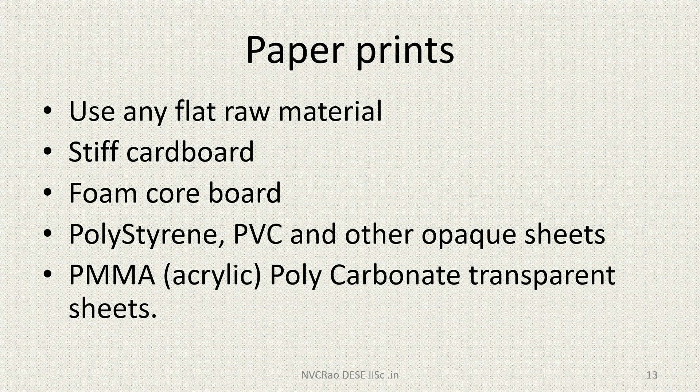Now, kindly look at my, what do you call this thing, saying it is very convenient for us to use any flat material, because most of the things are made and use the printouts as template. So, we have this template here. You can always stick it on the intended material, then you can carry out operations, then any work spot, like it could be anything.

Here it comes to mounting and fastening methods. Traditionally, in the case of molded parts, we have snap in place. Snap in place works well, but even there the first time simulating the snap fastener is a little tough. So otherwise probably use a screw or something, or even putting a tape is no problem. Holding two parts together, just about anything goes and your prototype is ready.

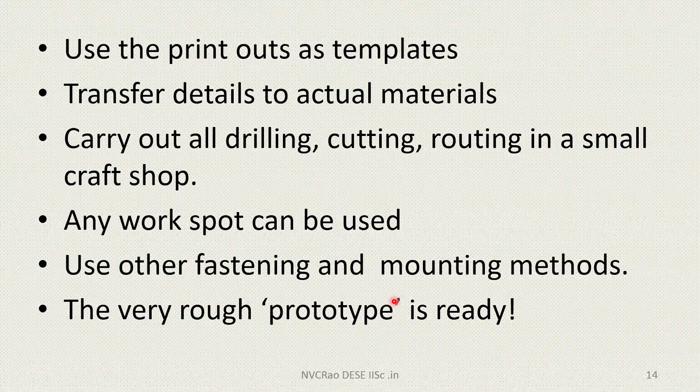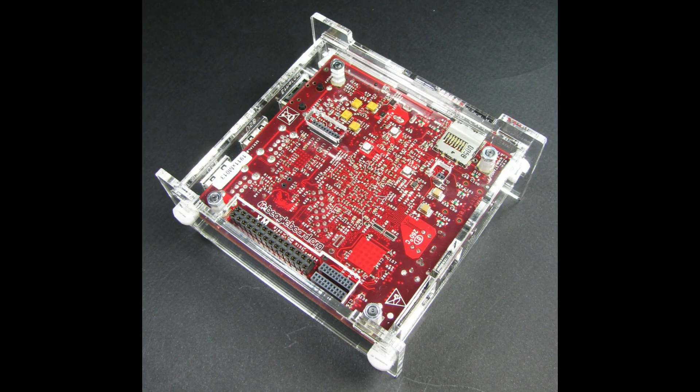Now, let me start with a few samples. This of course is taken from the available resources, and I acknowledge whoever has first made it and got this going. This one is a layout sheet prepared meant for probably laser trimming or laser cutting and assembling the whole thing together to make a beautiful system like this. Have you noticed this?

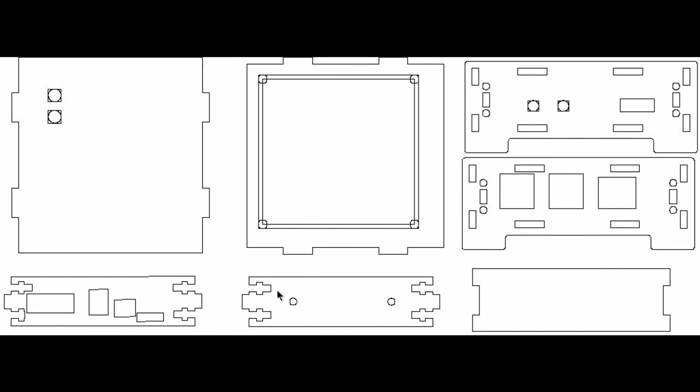This uses exactly all the parts that are described there, and in the corner, have you noticed this? There is a special key like thing which is assembled here. This key probably sits here. You see here there are some places, each will snap in place. Then you have seen these two things. These probably go and sit somewhere. So, you see here

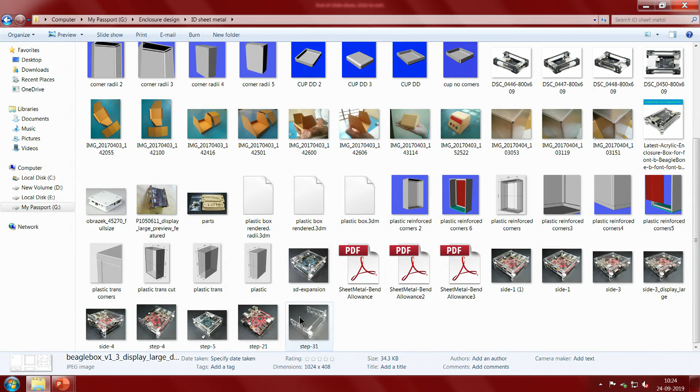even production parts are made with flat sheets, and every time you need not go and depend upon a full fledged printer... See the sequence. So, you have one pair part and then after that, see these are all, probably I will call it one face and two opposing faces, something goes, and then I just pointed out to you about the key or some fastener which is put here, and on the other side there is a bottom which is stuck on these things.

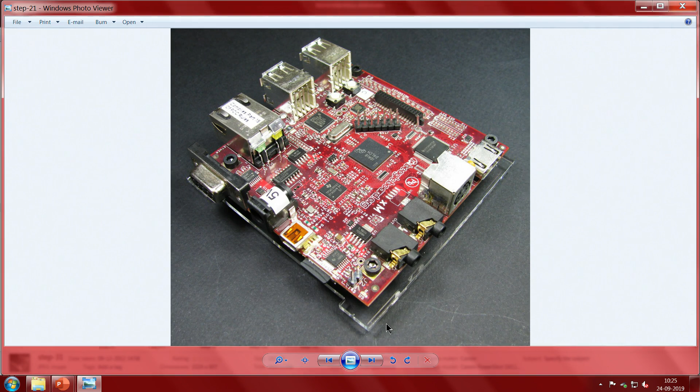Why I am showing you this is, probably this whole thing could have been made in cardboard at home, because cutting a cardboard is easy. Now, you see here the moment you assemble everything, we already have a nice neat box, and here this key has been shown. Now, maybe you can relate that you push it inside and everything sits here, just opening, part of them are open, part of them are joined together. See how cute the whole thing looks.

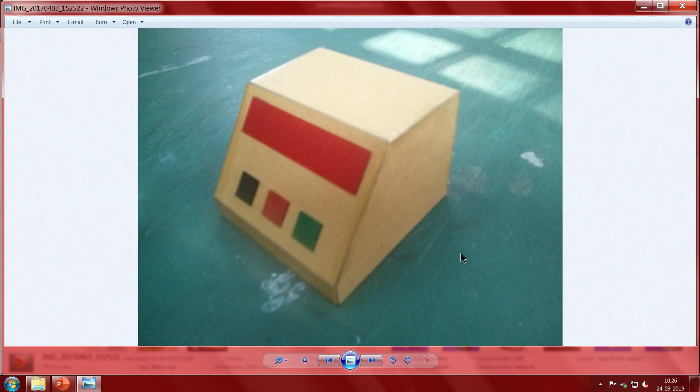Now, let me take the case of something which is invariably the reality of fabrication. Now, imagine one small, I will take this. See here, it could be any, this is just made as a student exercise. The idea being a cuboid structure, and there are the basic 6 faces. Right now ignore, of course there is a 7th face, ignore that. For you to understand typically the size, how you will hold it in the hand and so on, you have seen this.

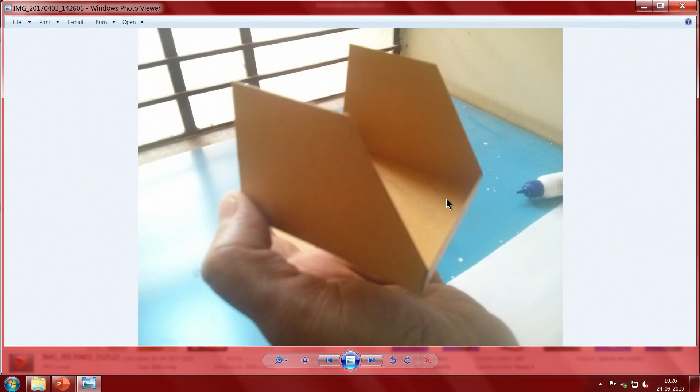That is my hand, and the whole thing is assembled by making things out of a simple cardboard. In this case it is a hobby cardboard, and two important details you will notice. I am sure you notice this. In the front there is a small tab, and at the back one more tab is there. The function of the tab is that it will hold the structure together, and it can also be used as a fastening technique, putting one on top of the other.

This being a flat object, it is exactly how something made out of polystyrene, or acrylic, or PVC, or polycarbonate can probably be made as well. Yes. Now you see both of the parts are put together. I have noticed some very interesting things about it. First of all, just for simplicity's sake, thickness has been ignored. But in the case of sheet metal, we will need to consider the thickness.

And you see a gentle inward curve is given that will ensure that things fit. Now you see this is a development drawing, I mean not a development drawing, a developed sheet based on a development drawing that has probably been pasted on an A4 size sheet, and they have just trimmed it according to that.

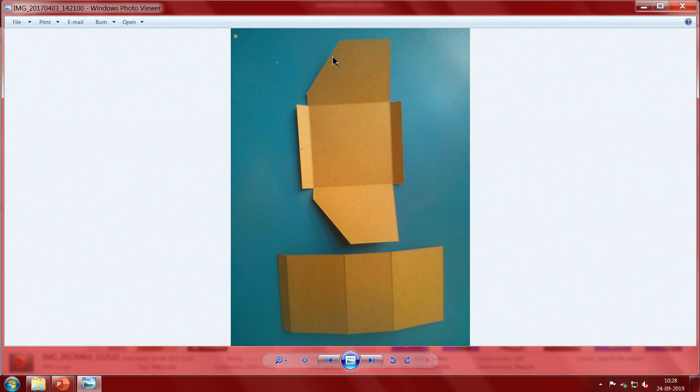So a little bit of thought has gone into that, and transferring such a thing directly into fabrication in large numbers is very, very easy. I just wanted to, as part of this, you have seen this, that is all that is needed, nothing exotic, nothing big, nothing very different.

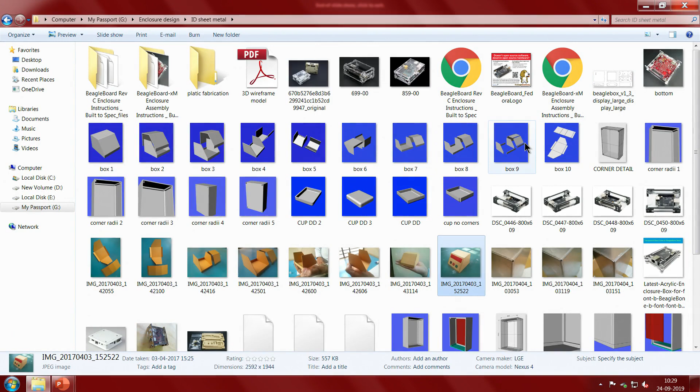Now, this is a slightly modified version of the other thing. If you are to use any other material other than the cardboard and which cannot be easily bent, a much easier way would be to probably make it into separate pieces. So here it is probably made out of an acrylic material, or in our case generally what we do, the top cover, this portion of it will generally be made of acrylic so that somebody can see inside, and this whole thing will be made probably out of acrylic but opaque, so that it looks a little like a product, but then you can place this on top of it.

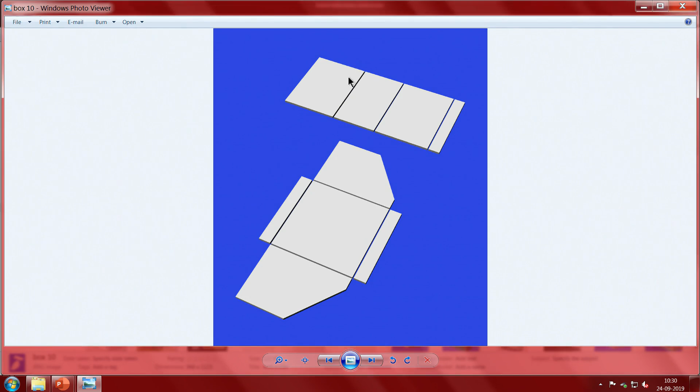Now we come to the interesting thing, what about the front panel which you are talking about. You see here all these pieces are small pieces. Now the first thing you will discover as part of your prototyping is that thicknesses are involved. Can you see here? There is a thickness, and now we need to take a decision: the height of this, does it go inside this and this portion covers it fully, or alternatively this is one portion and you have it as side two end caps. Depending on your design and various things you would like to have, you need to make a decision to subtract the necessary thicknesses.

Now we come into this corner, you have seen this here, this is cut normal, this is also cut normal to the surface. Does it match? Of course it does not, but you see here, the way this is shown, if I assume that this is a 45-degree angle, we have 90 plus 45, 135 degrees here, it does not match easily. So, at this point, a good craftsman, or you just need to match things and put up with it as things are.

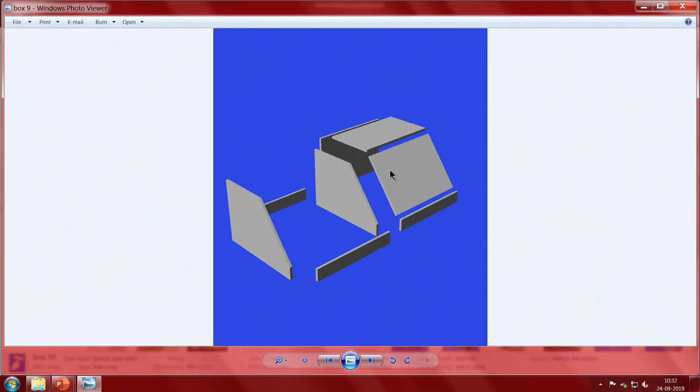Now, we come with a very clever alternative. Why need to match it at all? Why can't you let the top portion overhang a little? Let it overhang. Similarly, let this overhang a little, let this be recessed inside, and the moment you make this overhang by say 2 millimeters, you can have the side panels also jut out by about 2 millimeters. So, you have a bezel-like structure, three times a bezel-like structure, and you can probably hide all the imperfections. And part of the advantage is from the inside probably these two can be joined together using simple super glue or hot melt.

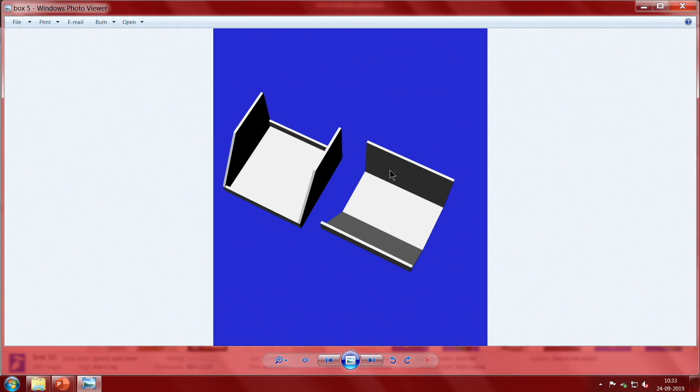See this, of course it looks miraculous, they have all been attached together, and now what was a thicknessless thing, suddenly there is a thickness. You need to just put these things together, and the other side of the view, see this, looks all hunky dory, there is no problem at all, except the little hunky doryness will probably need to be cured. You see this corner, this corner seems to be a problem.

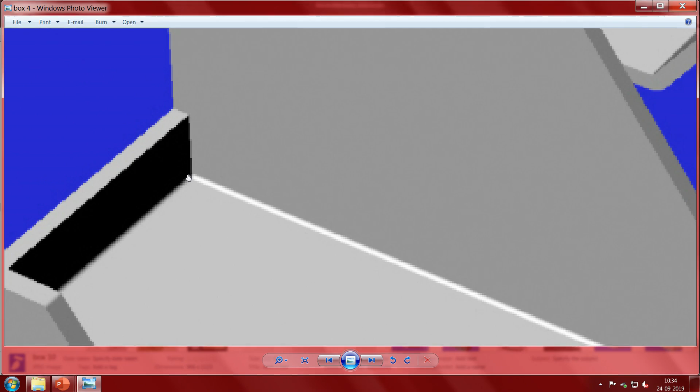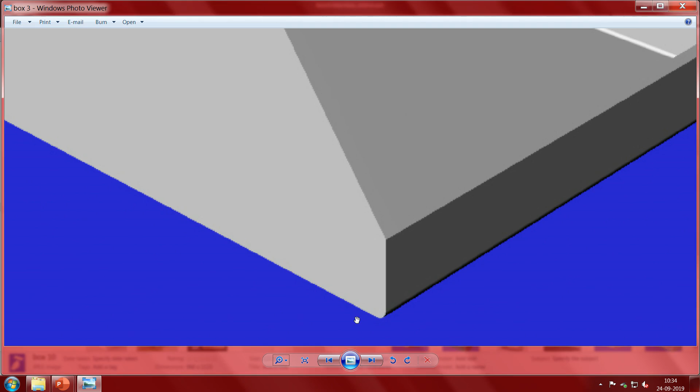In the original development, we have just assumed these things fit nicely, and then in this corner you will see a very, very interesting problem. This being a sheet metal exercise, you will see that there is always a radius here. Can you see? You have a radius. Now, how do you let the radii match with each other? We have chosen to ignore it, but actually there will be a gap here, and when it bends here, you need to give a corner relief for the whole thing.

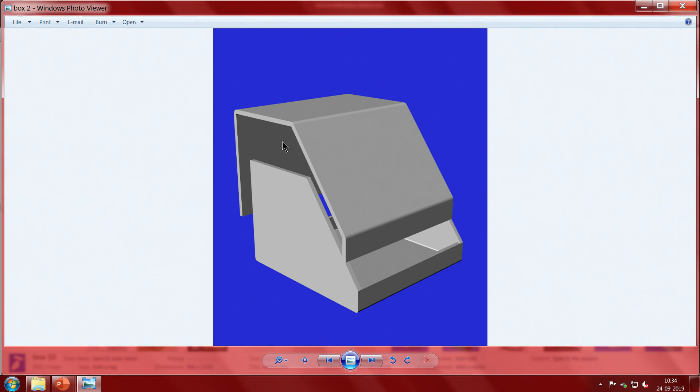So, we come to actual manufacturing practice, and this is what I was telling you here. You see this internal, and you see this internal, this appears sharp, but that has a radius. Something has to be done to address all those things. Eventually, when you put everything together, things should look neat. See here, neat means neat.

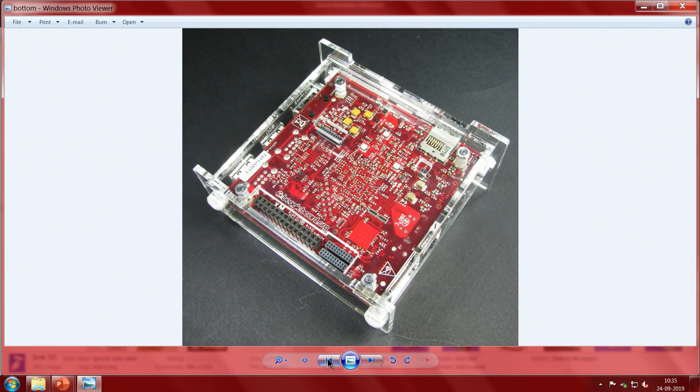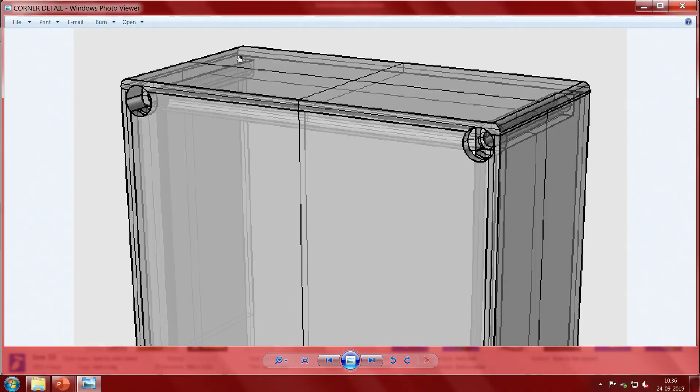Now, let me get on with something slightly different, a universal enclosure. Often you find this in the catalogs. In the catalog, you will find these are IP, that is ingress protection 54, 55 class of standard electronic boxes. You will discover some very peculiar situation by which your particular requirement does not fit into an available standard unit, because you have not started with that. You have not started with the standard enclosure and arranged things so that they can suit you.

And unlike the BeagleBone and unlike the Raspberry Pi and unlike the various other things I have shown you, Arduino, this is not a standard for which this IP enclosure has been made. IP enclosures have been made in a fairly interchangeable, universal big system. So, if you are smart and you know that you are replacing another equivalent existing unit, you can use one of those standard modules and try to fit your electronics, especially non-PWB hardware. I mentioned this to you right in the beginning itself.

We have connectors, we have control elements, we often have displays, we have so many of these things which go into that. So, if you see inside one of these enclosures, it is actually not a molded enclosure. This has been just created in a solid modeling exercise.

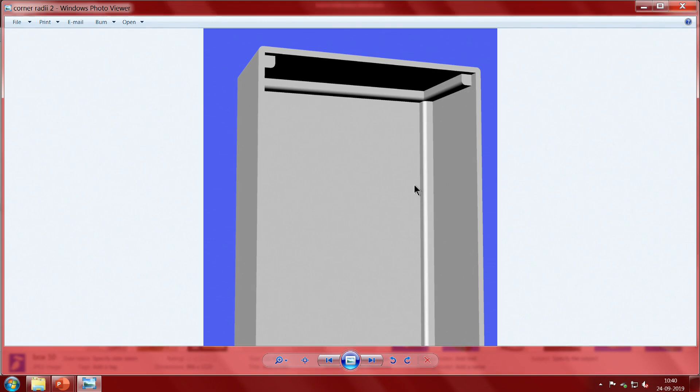This looks a little like this. Actually, it is nothing, just for my satisfaction, we have rounded it. 4 side faces of appropriate height have been taken, and these corner pieces have been attached to that. This has been filleted on the outside, otherwise there may be a fillet here. They have been filleted, everything has been joined together. It looks as good as a manufactured item.

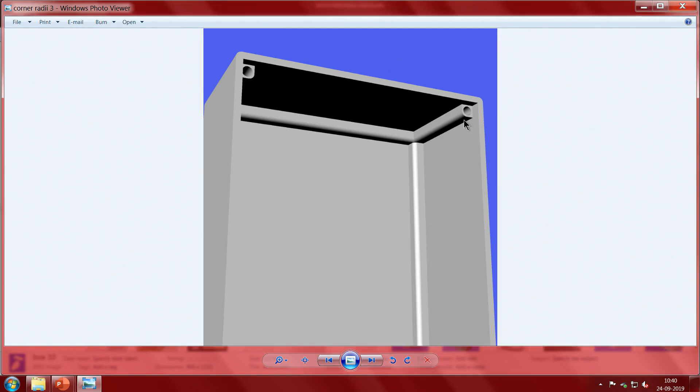Now, standard operations like drilling have been done, and on the top you have this. Now, you have a box, or you have an enclosure which is ready for me as I want. Notice something here, this is probably the back, and then you notice something here, something which is very, very interesting.

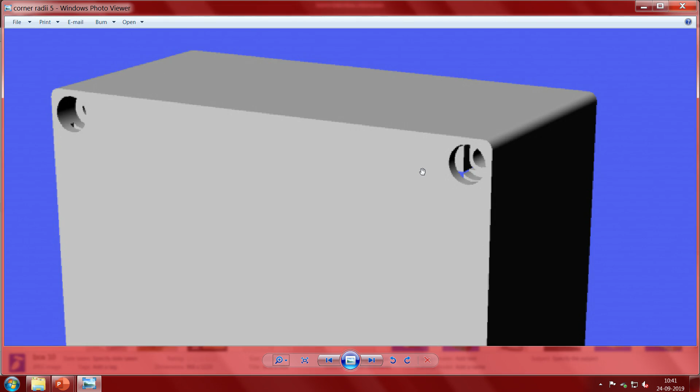Counter bore, and then on the other side there was something where it matters with a small adjustment. So, you can build in detail how you would like to deploy it somewhere. Do you need to have a clamp, attach it somewhere? All these details can easily be worked out.

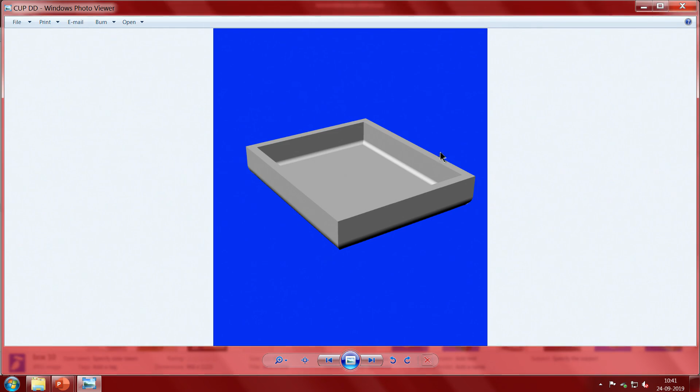Now, I will come back to a small thing I am sure several of you have seen. This is actually one of the small items which comes with our earphones. A thing like this eventually will be made in plastic, but if you are to make it in sheet metal, you will end up with a very, very unpleasant thickness all around it. Because of the small size, this thickness looks very, very daunting. Now, we come to the equivalent sheet metal of it.

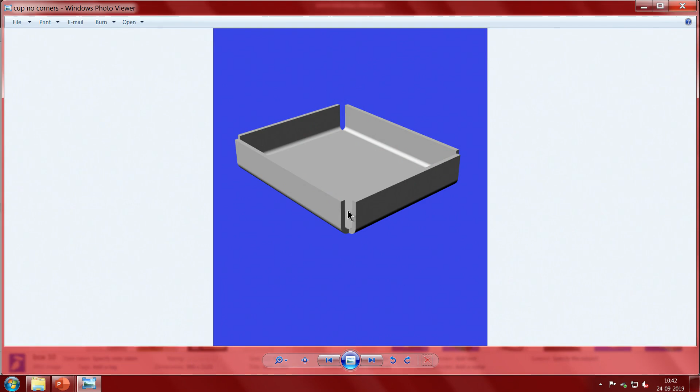Imagine that particular thing needs to be strong. Like if you throw it, it should not break. It should not be made out of a brittle plastic which is likely to shatter in the corners. So, we end up with the sheet metal version. You have seen the sheet metal version. This is what I was trying to tell you.

This corner, we end up with very peculiar detailing. There is no way around it. The only other way is probably you go in a little on that side and then bend it up like this. So, overall the dimensions can be maintained. Interesting, isn't it? This is where making a simple prototype helps.

Even our people who work on sheet metal often make that sample. They just take any available material. In my case as an engineer, probably cardboard is better for you, but in their case there will usually be some surplus or scrap material. They make a print, stick it on that surplus actual material which is likely to behave a little like the original material, then carry out all the operations and then do the correction in the main drawing.

For example, one of the things I tell you, I take it that approximately there is a box of some given dimensions.

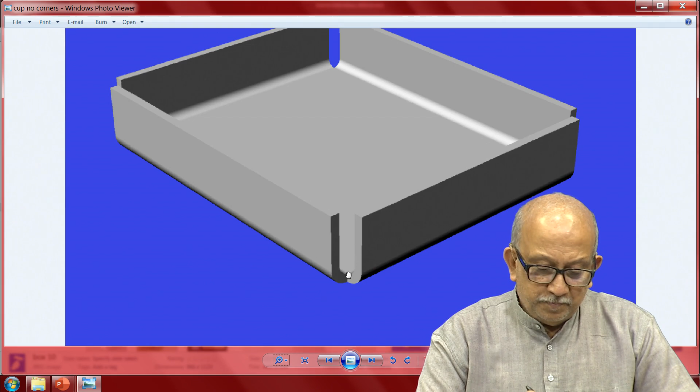I take it from one side to the other, this may be around 30 millimeters, other side may be 50 millimeters. So, 30 by 50, while it looks very fine here, you need to compensate on taking this thing inside. We take a small thing inside here, and once you take it and make a bend here, this thing is likely to jut out.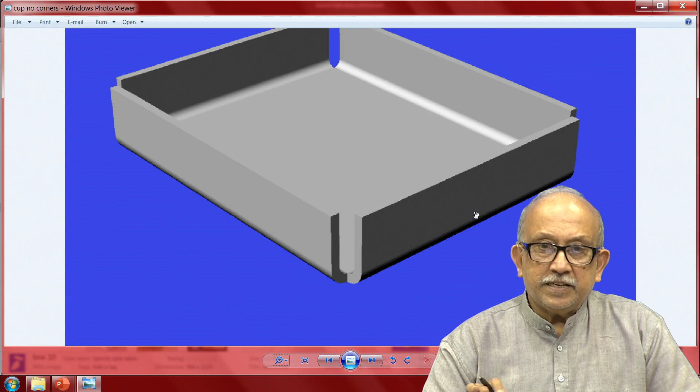All these dimensions, everything can easily be worked out in any CAD program. Typically, most students I come across are familiar with either Solid Edge or SolidWorks, and most of the products either by Dassault or by Siemens or any of the Autodesk products also have a sheet metal variant, a sheet metal add-on. Those sheet metal add-ons take care of all these details, but the main problem is

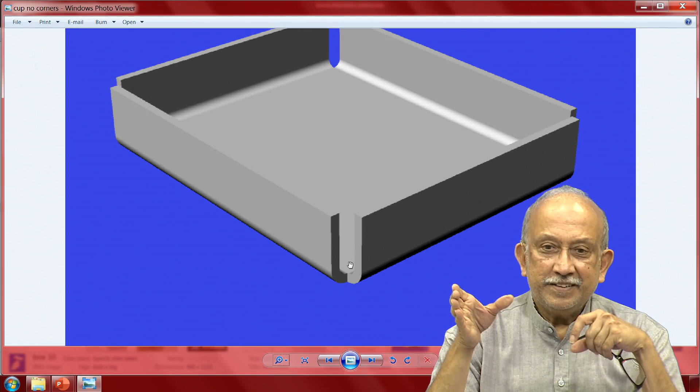data regarding the compensation, what is called the bending allowance, and behavior of the material, saying what is the minimum internal radius, and the type of fabrication machines you use. Everything is a variable which has to be taken from the physical shop. This is not a problem actually, this is a real issue with all the simulation work.

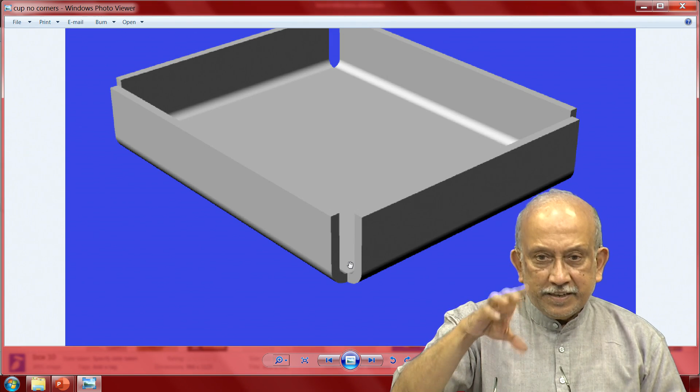There is a physical phenomenon. Based on the physical phenomenon you simulate, and then you find that one particular ratio probably needs to be altered a little, and hence you can either search for the material or make a compensation. The same way in our case, one still needs to make a sample piece of the final thing, especially sheet metal, and note down all the details.

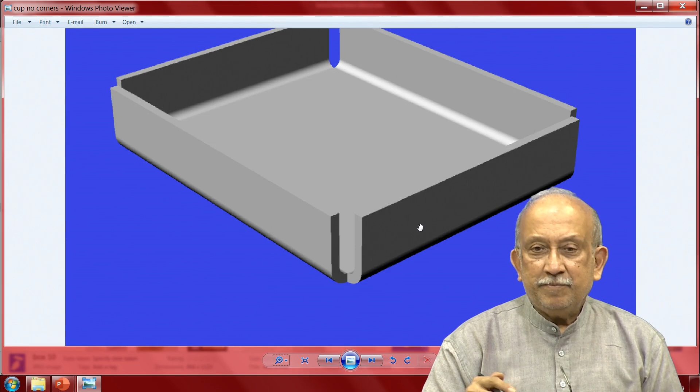In absence of this, for most standard materials, data is available. It may be off by maybe 0.09 millimeters. In general, it is very accurate and it does not really matter. For these things, once again allow me to stress that the starting point is a good CAD drawing and a concept in the mind.

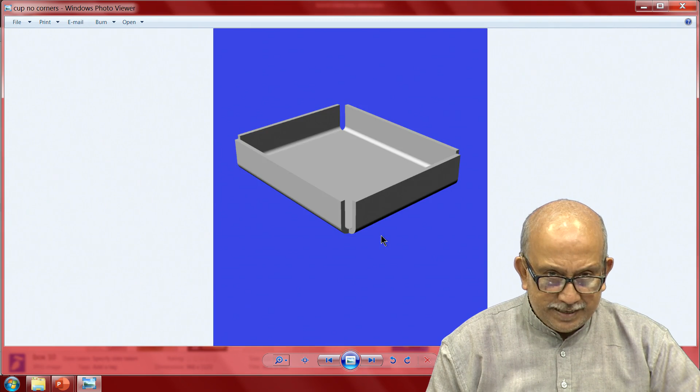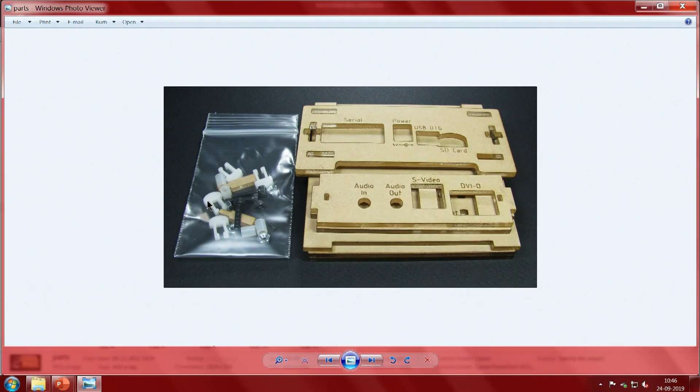Now, let me see what the next one is going to show. I do not know which part of it is metallic, which part of it is this thing. Now, you see here we have beautiful, I think I have covered this. I will now go back and pick on something slightly better. This is the laser trimmed or laser cut materials which are available on sale.

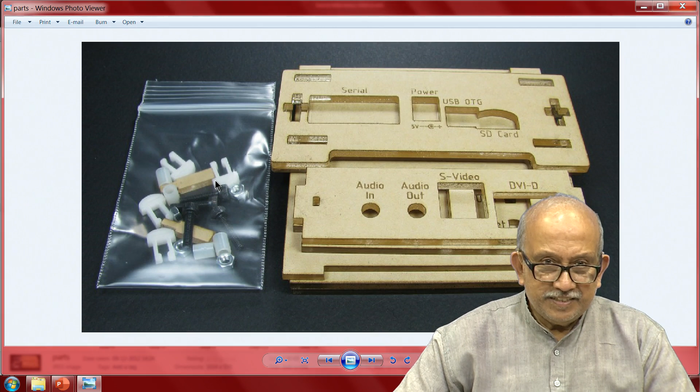Have you noticed, for example, your particular project may not need these two things, may not have audio at all, and you may have an SD card, but you may not have an OTG, on the go, cable. In this case a 5 volt power supply is shown there, but you may be using a USB, and the serial port is only needed at the time of programming, so you need to have a tab which can cover it. So, now you will notice that once you get all these items, this is a kit.

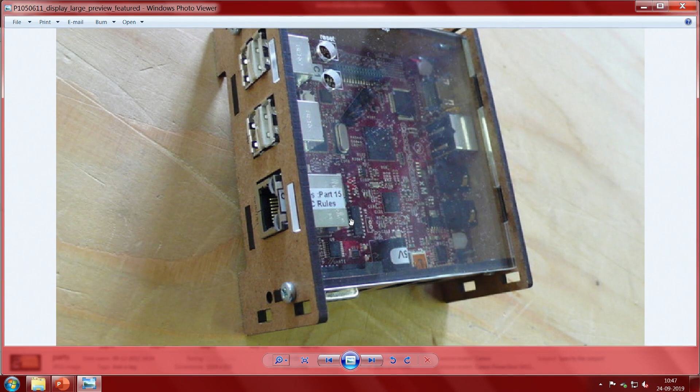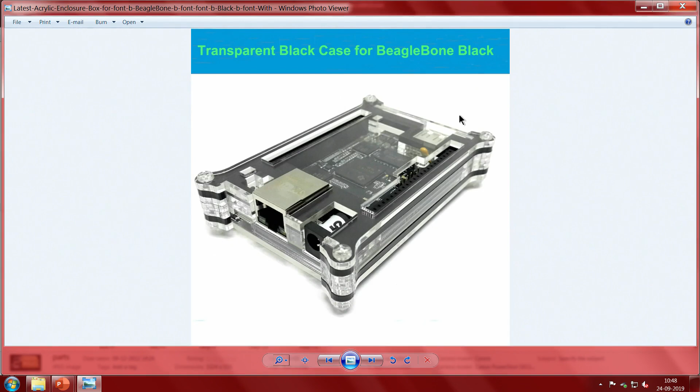Now, what about this? This is probably made by one of our students. You have seen this here. While this is actually made in a laser cut plywood, I am sure the whole thing could have been easily made by you in any other material. This of course is a professionally made item. So, you have various things which are sitting here. So, you can see these things can be built easily.

If you remember, the earlier slide showed you the corner that needs to be taken care of. The first time you go to the fabrication shop, you will notice that these details, while they are critical, are probably killing the product. You wanted a product which looks neat. All the renderings I have made look too neat, but this is the reality. So, how do you get over this? One reality is a radius. Another reality is gaps that do not close.

Fortunately, this is not your problem. This is the problem at the fabrication level. The first time, remember, you are likely to make everything out of assembled sheets, and then you show this, their process planning people will try to work out how best to make things. You see here, there is a very ugly sharp edge. When somebody tried to work on the sharp edge, it did not come out well, it only made it worse.

It looks crazy. This is a drawing made by one of the very common 3D programs. It is not by definition a full fledged prototype making app or software. It just shows the dimensions I want, saying this is probably 80 by 120, this thing would have been maybe 25 or 30 millimeters.

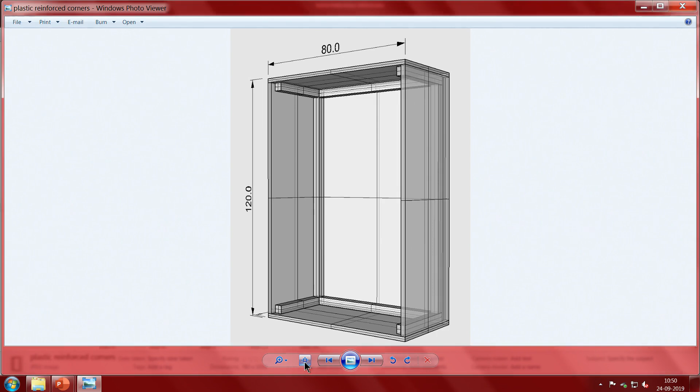Now why this has been made is, see this corner. What shows 80 is correct because it is visible, but this side plate need not be 120, it will be 120 minus 2 of the thicknesses.

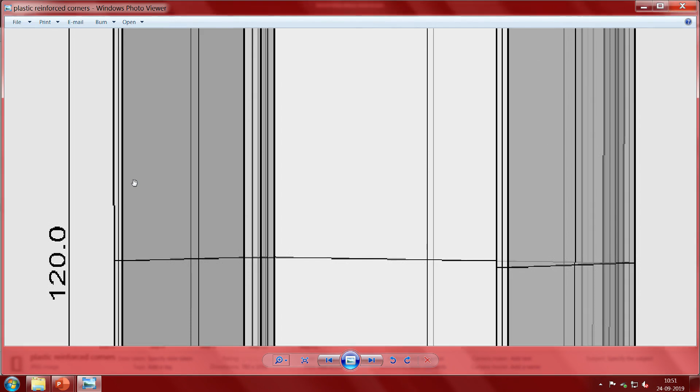Looks insignificant or trivial, but this is the one that makes or breaks your product. Once you take the initiative in making these things properly, you will have nice, neatly made corners. And you see here something else next.

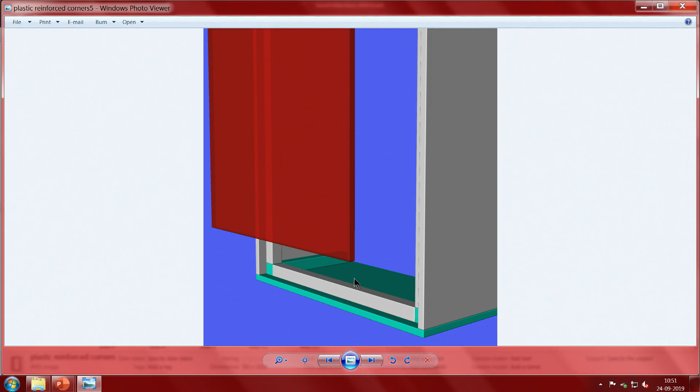You can even, in case you are using acrylic sheets and all that, use grey plastic, and I do not know why I have chosen green, just to show that I can choose green, and the top cover is an LED red filter. You can make the whole thing in one material and then add a small filter; the full thing can be made this way, and the remaining part can be masked. So it looks like a real-life product.

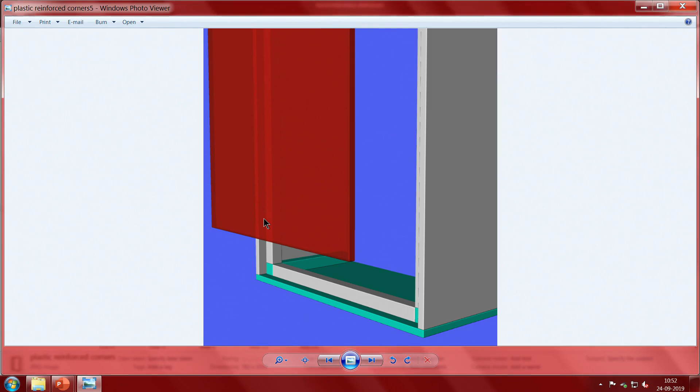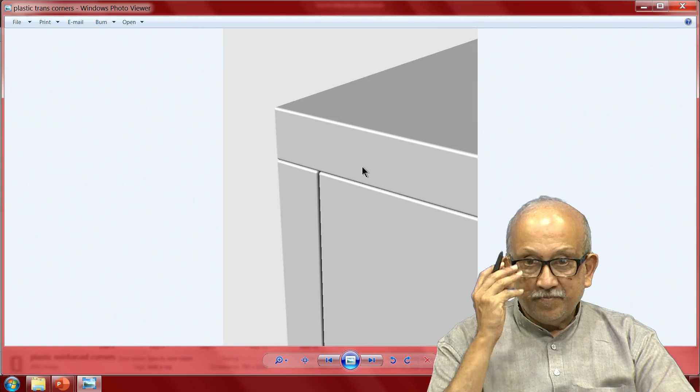So you have the advantage of happily using the smallest things available and trying to come up with things which perform identically to the main material. And if you are lucky enough to have at least 2.5 and 3 mm sheets, you can directly work in plastic sheets. Alternately, for the first 2 rounds, you can work with cardboard, as I said, foam core. So many of these things are available.

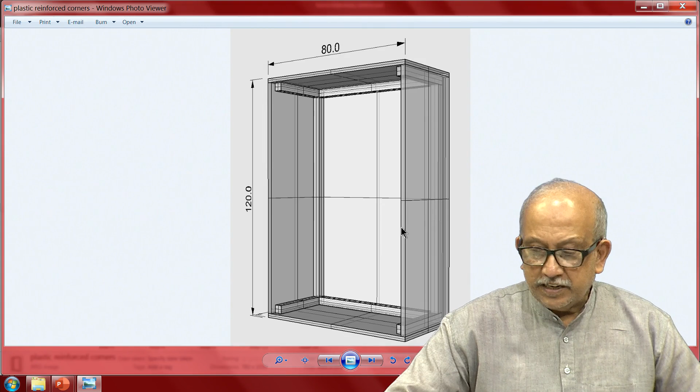So, I will stop here because it's still quite a lot of things that have been covered. I will just show you this, though it is not directly related to the point here. This is exactly what I was trying to show you. Now you will be asking, sir, you started with something to do with making things simply, why are these required like that? I just wanted to show you that in real life these things are involved. I will not go into detail at this stage, because by definition I wanted to stick to something which you can make at home.

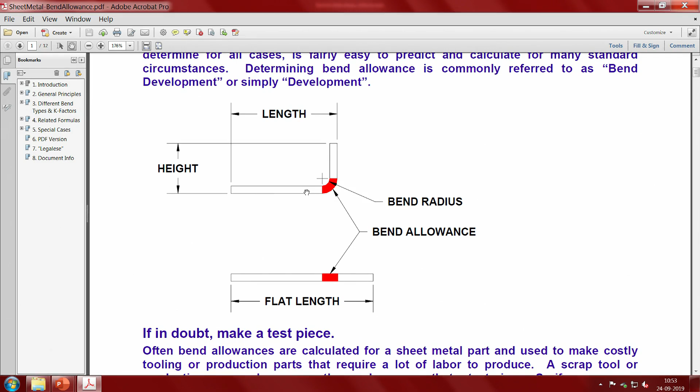Which brings us to another important aspect of things. Even thick cardboard, anything more than 0.5 mm, involves a radius and involves a bending. Now how do you take care of this bend? As I told you, usually you have an inside radius, then you have an outside radius. And how do you make these things take a bend neatly? Just try it, take a piece of cardboard, try to bend it a little here and there and see how well it goes. So thank you, I will stop here.

Meanwhile, I want you to think about a universal remote which you use in your workplace, or in case you are a student and you have your own room. What are the various things your remote needs to have? It should not be very complicated like the ones that I have shown you, with so many knobs, so many things which are not really relevant to us, and if anything they are only distracting. And if you have an app, yes, you can work with an app, but these days remember a lot of apps require having Wi-Fi somewhere, or they insist on Bluetooth connectivity. A lot of devices may not have Bluetooth connectivity.

And what do you do with the old audio set, or in case you have a sound bar, or a television with a set-top box? And here we get into that very peculiar thing. If you have a set-top box and a TV, you will probably only be controlling the set-top box and definitely not have further control of the main display, because if you play with any of those elements on the remote, you will lose the picture, because it will go off into a separate input mode, separate output mode. And some of the remotes have teletext and Oracle, which I do not know if it really works, or it's something they tried and it never took off. The remotes are still made in large numbers, and there is nothing we can do about it.